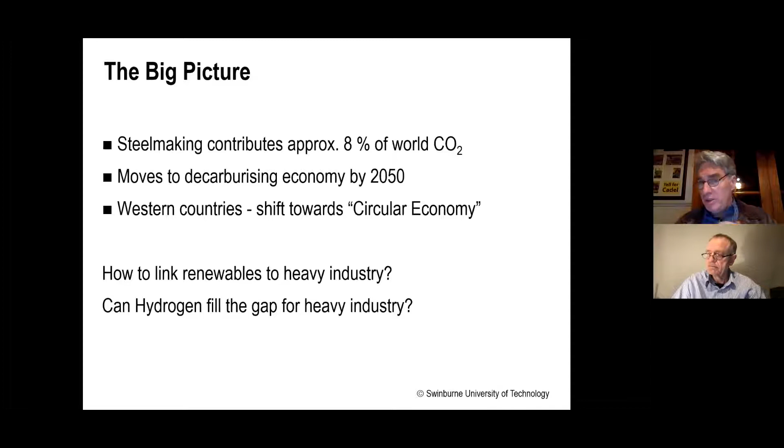That's not so clear. Recently, people have been proposing that one way we can do that is by using hydrogen. People are saying hydrogen's the answer, and it's become a bit of a hyped up idea at the moment. I think it's an exciting idea, but we need to pull it apart and have a look at how it works. By talking about the steel industry, you'll see some of the generic issues around hydrogen and what we have to think about when we say we want to move to hydrogen.

Let's get a picture of metals - a bit of metallurgy 101. One thing to realize straight away is that steel is a huge, absolutely enormous industry. What we see here are some of the principal ores in the world and roughly how many tons a year are made of these metals. You'll notice that steel is over 1,800 million tons a year - I want you to try and imagine what that means.

Aluminium is 63.7 million tons, the second metal. So steel is an enormous industry, and it's also growing - it's doubled in the last 20 years. Steel is not flattening, not on some sort of plateau. It's plateaued in a lot of Western countries, and there's good reasons why, which we'll talk about.

But on a world level, it's still continuing to grow. The only thing that's really comparable to steel that I can think of is cement, which is around double the size. When you look at some other materials you hear a lot about, like plastics and fiber composites, you realize just how enormous steel is.

To give you some sense of it, if you've ever been to Wollongong, the plant there was designed for 5 million tons a year. So basically the world is 1,800 divided by 5 Wollongongs. And I mean all of Wollongong - the harbour, the schools, the railway, all the infrastructure as well. So we're talking about some enormous industry.

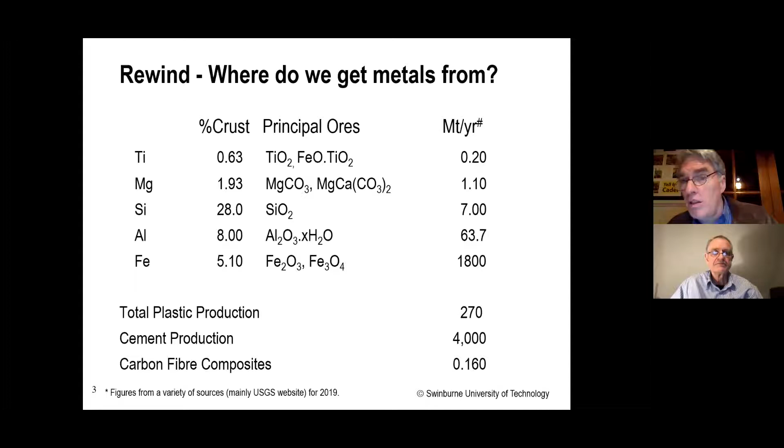That raises an interesting question, because in that list of metals I mentioned titanium, magnesium, aluminium. They're very impressive metals with very impressive properties - some of them, like titanium and aluminium, are a lot lighter than steel. So why is steel so huge? It would take a while to go through all the reasons, but one of the most important is because you need a lot less energy to make steel.

What we have here are some calculations done by my old PhD supervisor at CSIRO. He looked at Australian conditions and how much energy is required to make titanium, magnesium, aluminium, stainless steel, and steel. On one side he's got the energy, and on the other the global warming potential - how much CO2 is associated with that production. Of course you'd expect those two things to be quite related, and they are. You can see that steel is incredibly less energy intensive than titanium, magnesium, and aluminium.

This is why steel is so popular - it's got good properties, not as light as some of those metals, but excellent properties, and you don't need that much energy to make it. So steel is already a relatively high efficient industry, but of course a tiny difference in steel is a big difference in the world. That's one of the things that's motivated me to work in steel.

I haven't worked much on titanium, but I've worked a lot on aluminium and magnesium, and a bit on stainless steel. But one of the motivators of me working on steel is the pure importance of it to humanity, the pure scale of what it means to improve something in steel.

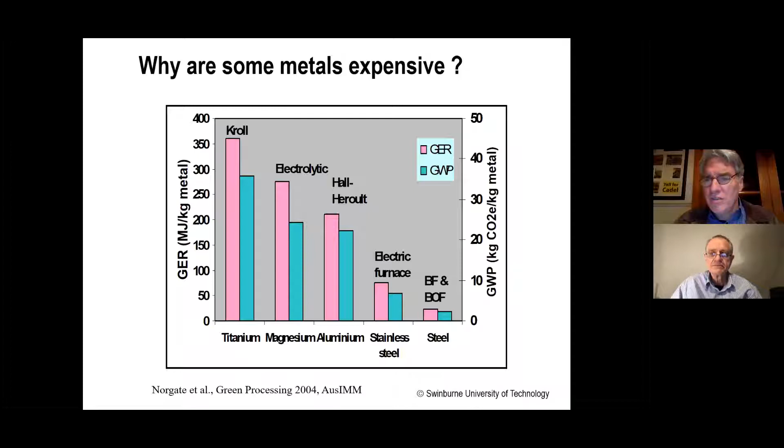So I hope that gives you some sense of the scale of what we're talking about. Australia is a major player in this game because we are a relatively minor steel producer, but we are a very large iron ore exporter. We're one of the great iron ore exporters of the world, probably the greatest. Maybe Brazil would challenge us.

When you look at iron ores, they come in basically two major sources, hematite and magnetite. And there are other ores, goethites and siderites. These ores, if they were pure, would be above 70%. But in reality, they're lower than that because of all the impurities. And the impurities are very, very important to what we're discussing tonight. As you'll see, they're not trivial issues, and they're not trivial to Australia. Basically, you'd say a high-grade ore is 65 and above, and a low-grade ore is anything below 62. It becomes a lower-grade ore.

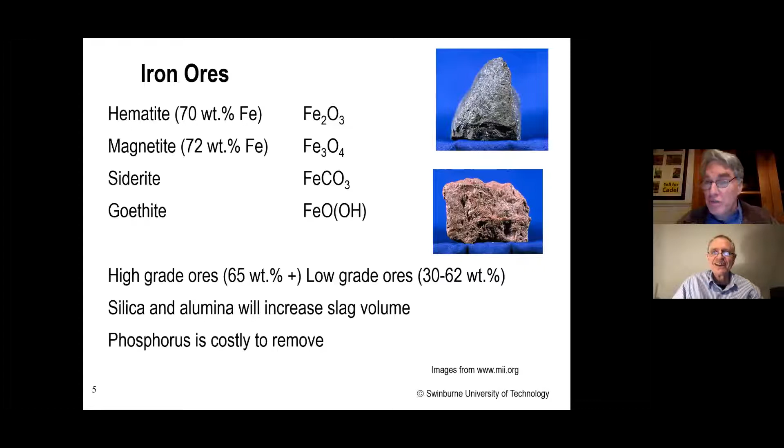The impurities, which are normally silica and alumina, add a lot of issues to the steelmaking process. The one thing that really adds a lot of problems is phosphorus. I'd have to give a very boring half-hour lecture on thermodynamics to fully explain why phosphorus is such a nuisance in steel, but the basic reason is because it behaves chemically very similar to iron. Therefore, it's extremely difficult to get out of iron, because you're trying to remove something like iron from iron. All right, so that's basically the problem. Whenever I teach the thermodynamics of it, I use football analogies about taking Collingwood supporters out of a team of Carlton players to try and explain the issues with phosphorus. But basically, they behave quite similar to each other.

As I mentioned, we have a giant iron ore industry. I think everybody in the room would be aware of that. And the industrial revolution of China, which must be the greatest industrial revolution of all time, has fueled an incredible growth in our iron ore industry. I think everybody is aware of the incredible money associated with iron ore over the last 20 years. And so this has a great deal of bearing on the wealth of Australia.

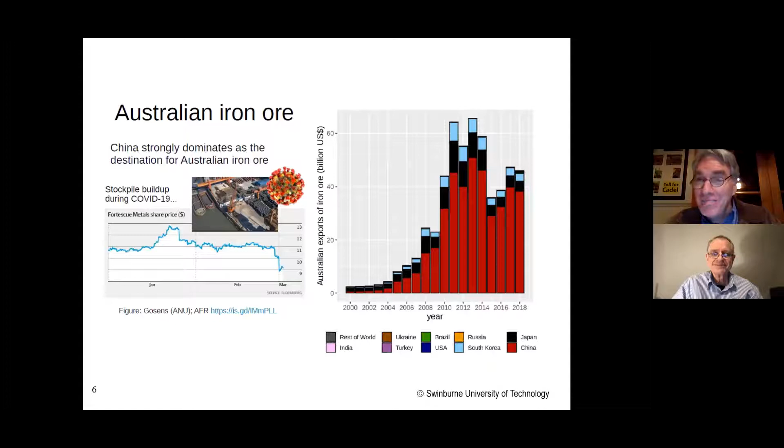A really big issue that we're going to talk about tonight is, if we move to a hydrogen economy, what does that mean to our iron ore industry? That is a very interesting question that's actually keeping a few people awake at night. So we'll talk a bit more about that.

So one of the big issues facing the Australian steel industry - sorry, the iron ore industry - is as they dig away more and more ore, they get to lower grade ores, and then we've got to find ways to try and improve the quality of the ore in a financial way that will allow us to keep selling these ores. So this great iron ore boom, we shouldn't just assume it's going to keep on going. There are major technical issues there. I've done personally a lot on trying to upgrade magnetite ores - I won't talk about that tonight, that's a whole separate topic in itself. But these are big national issues, and there's a lot of serious people working on it.

This gives you an idea of how ore grade is changing with time. We see here some historical numbers - this has been put together by my friends at Monash and RMIT, who did a nice study on this. They show the way in which ore quality is changing with time. You'll see that Brazilian and Australian ores are at the top there, around about 60, 61, 62%. And we see Chinese ores aren't very good - well, fortunately for us, because they want to buy our ores. You can see there's a general trend down, as I described. Basically what's happening is we're digging up all the good ores, and we're left with the ores that aren't as impressive.

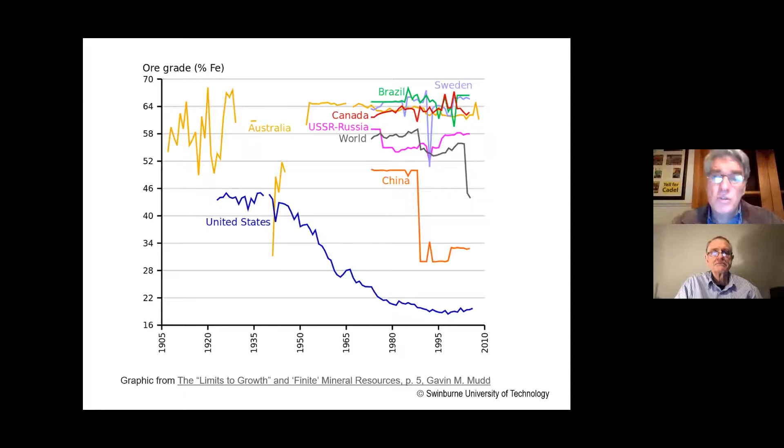So this is going to be a big challenge, not just for Australia, but for humanity, because there are all sorts of energy repercussions to the degrading of these ores. And then, of course, the products.

You'd have to be quite an ignorant person not to realize the importance of steel. Here are the major products that come from steel. Infrastructure is enormously important in the developing world, and on the right-hand side we have domestic appliances and automotive, which become more important as you become richer.

So basically, when China is progressing across that graph, 20 years ago they were all about building things, buildings and bridges and railways, etc. As they get richer, they'll become like us and start buying fancy domestic appliances and imported Swedish kitchens, pushing across that line of products.

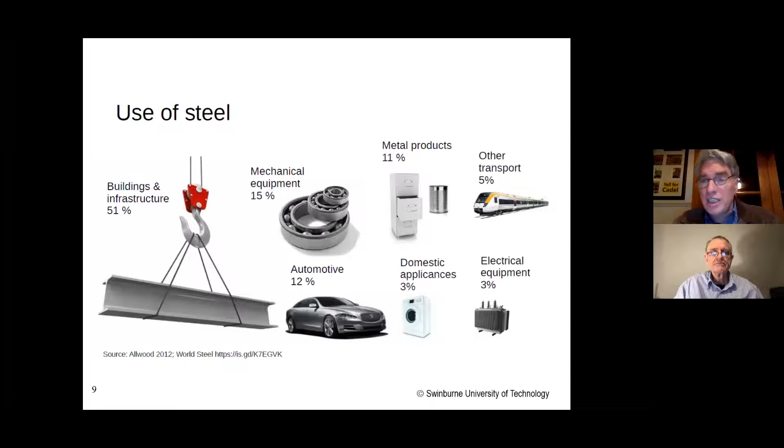Basically, it's more complicated than this because there are literally thousands of steel alloys. But as you go to the right of this diagram, it's more difficult to make, it becomes trickier to produce. So there's a lot of knowledge in being able to make all those different products from steel. That gives you a sense of the breakdown of steel, where steel is used in the world.

Now we get to the topic. This uses a lot of carbon, and indeed the world's steel industry is, as we mentioned, 8% of the world's carbon dioxide, depending who you ask. The Paris Agreement says we need to get that down to 400 to 600. That's a very large change, by 2050.

When you look at trying to work out how steel production will change over the next 35 years, it's almost certainly going to grow, and it may even grow more than what they're predicting in this particular diagram, but they're having an educated guess.

That means we've got to find ways not only to get rid of the carbon from the existing process, but also from future steel production. You can see on the right-hand diagram just what an incredibly large change we need to make to the intensity, how much carbon dioxide we produce per ton. We're talking about 90%. We're not talking about an incremental improvement here, we're talking about a revolution.

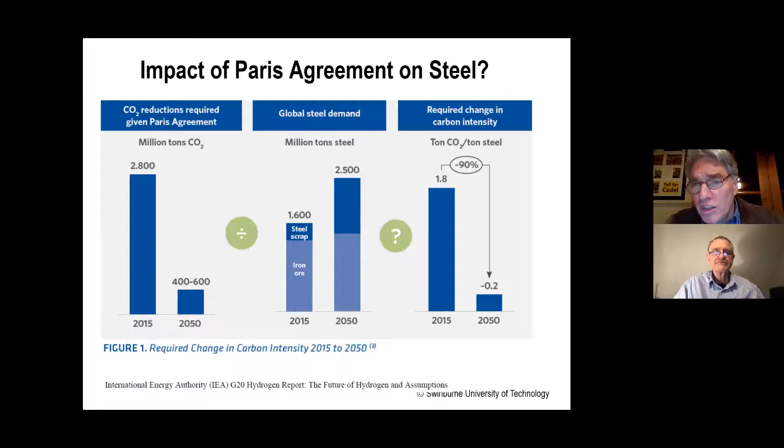So this is not a mild change, and this is what's keeping steel executives, iron ore executives, and professors who work in this area awake at night. How are we going to do that? How are we going to make that happen? So that's an exciting but also interesting challenge.

Now, I have an unfortunately busy but important diagram, so I'm probably going to spend the most time on this slide because it's important to understand. Basically, there are essentially three major ways of making steel in the world.

The biggest way is we start off with ore, and we get coal and turn it into coke, and take it to a blast furnace, the one at the bottom there. We put it through a blast furnace and make iron. That iron then goes off to a steelmaking process, the basic oxygen steelmaking process, where you make steel. Then the steel is refined, and then it's cast.

It's generally cast into what they call flat products or long products. Flat products end up in your refrigerator doors and your cars, and long products are reinforcing bar and beams and such things.

The other major way we make steel, the second major way, is we get scrap steel. This is what they do in Sydney and Melbourne at the Sydney Steel Mill and the Laverton Mill, where my friends work. We get the scrap steel, put it in an electric arc furnace, melt it, refine it through a ladle, and then cast it into different shapes. That's the second major way, running in the middle there.

How much energy is needed for recycling versus new steel? About half, roughly speaking, but hang on, I'm going to go into that in quite some detail.

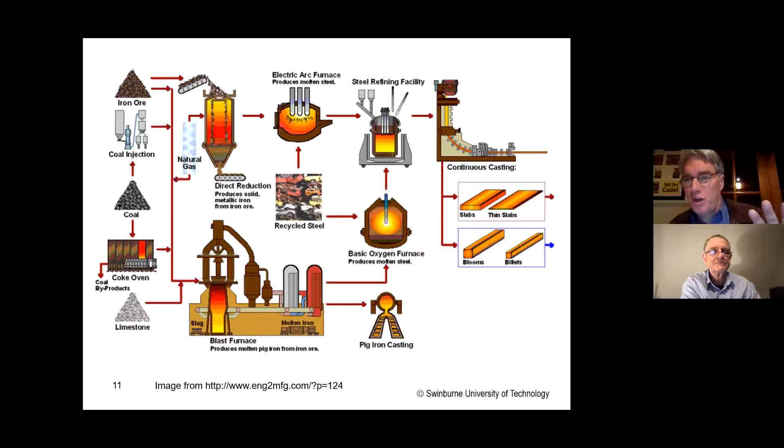I can imagine that's a little bit confusing, I think it'll become clearer, so we might go back to this diagram, but just to get the general gist of it: the blast furnace is the dominant way of making iron, and it's been around for hundreds of years. We've put tremendous development into it, and it's essentially a solid gas reactor. You've got gas blasting through these tuyeres, going up through the middle of the furnace, and it reacts with the iron oxide.

It's burning, basically converting carbon into carbon monoxide down the bottom here, and it goes up through this shaft, and you go through this sequence of reactions. The solids fall down, and as the solid falls down, it goes from hematite to magnetite to FeO, the FeO being reduced to iron. Then molten iron forms at the bottom. So solids this way, hot gases going that way - it's a solid gas reactor.

And it's very old, but it's also very impressive. It has very high energy efficiency, like 85%. For example, power stations are typically 35 to 40%. So it's a very efficient reactor, and there's been a lot of investment.

I'm happy to report that Australia's been very clever in blast furnace technology. Professor Aibing Yu at Monash and Paul Zulli at University of Wollongong have done a lot of work in this area to improve the blast furnace, working with companies.

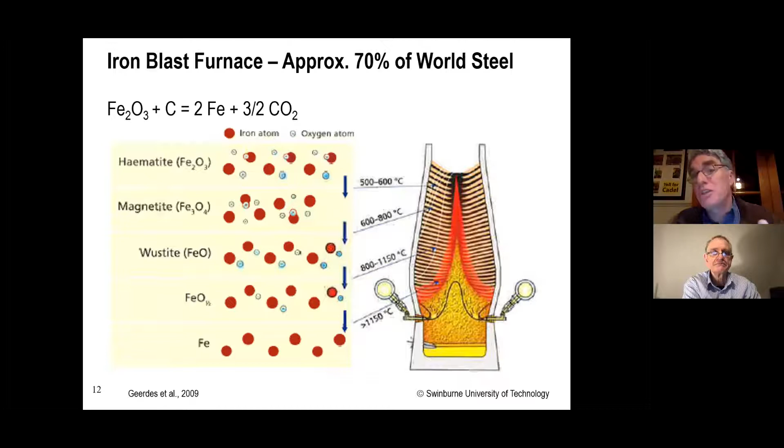This process relies on coal and coke, and the coal is turned into coke because these are very tall vessels, and the coke provides the physical strength and structure to hold all this ore up. So you can't just put any kind of coal in there - you've got to put a certain sort of coal that can be converted into coke. That's very important to Australia as well, because we're one of the world's great coking coal producers. So about 70% of the world's steel is made via this process, and there are a lot of details, but that's the broad picture.

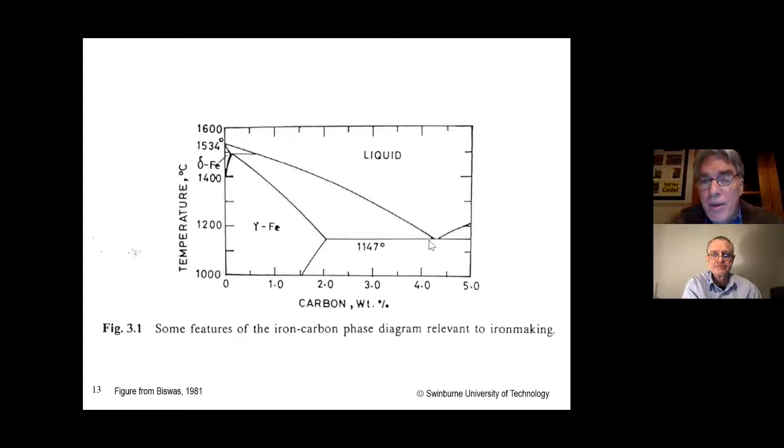One thing that's important to appreciate, because it'll become important when we talk about these new processes, is that as you add carbon to iron, the melting temperature decreases. You'll see here that pure iron is about 1534 degrees Celsius, and as you add carbon down this line, its melting point lowers to about 1150, or 1147, as written on the diagram. That's very important, because it means the blast furnace can melt this material fairly easily at the bottom of the furnace and produce the iron product that we tap out. Just a little important fact to appreciate.

Now, when you look at this process, the blast furnace and the oxygen steelmaking process is the big one in the world that makes most of the world's steel, and the blast furnace dominates the CO2. When you look at the total CO2 coming from the process, it's the blast furnace that is making most of it. There are other sources associated with other parts of the process, like coking and sintering, but it's the blast furnace that dominates. So this is where all the attention is at.

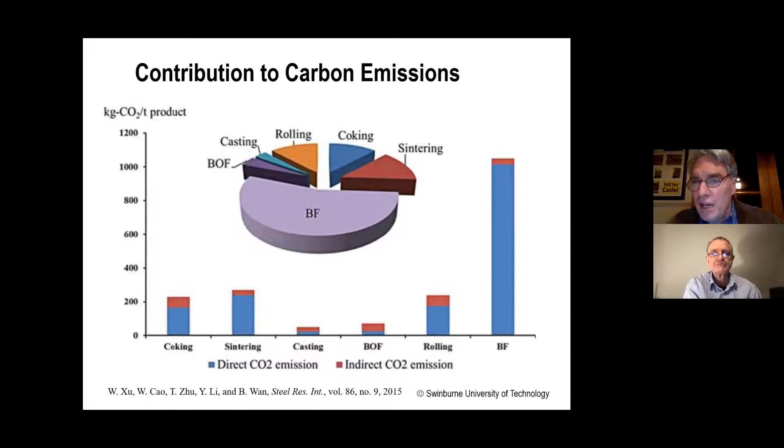If we want to decarbonize the steel industry, the first step is to do something about the blast furnace - stop putting so much coal into it. How could we do that? This diagram shows that quite clearly. Now, I've just been talking about the blast furnace, and because that previous diagram is very busy, I think I'll just break it down into a smaller step so everybody gets what's going on.

In the blast furnace, we get ore and turn it into sinter or pellets, and put it into a blast furnace. We then get coal and turn it into coke, put it into the furnace, and out the bottom comes a liquid product called pig iron, which has about 4% carbon. On the other side, the other way of making iron is DRI: they get iron ore, put it into a pellet, pelletize it somehow, and then react it with natural gas, forming a solid product - it's not liquid, it's solid.

You can transport it, you can ship it, you can put it on a ship. But because it's never been liquid, all the gangue materials are still in it - all those silicas and aluminas we talked about before. It's a solid product. So DRI is essentially a solid product with lots of gangue, and pig iron is a liquid product with no gangue. That's something to appreciate about the different forms of iron we're going to talk about now.

So gangue, what does that stand for? Is that an acronym? It means the materials that you don't want - silica, alumina, like slag, only before it becomes liquid. Yeah, so it's a slag. It's a residue you don't want.

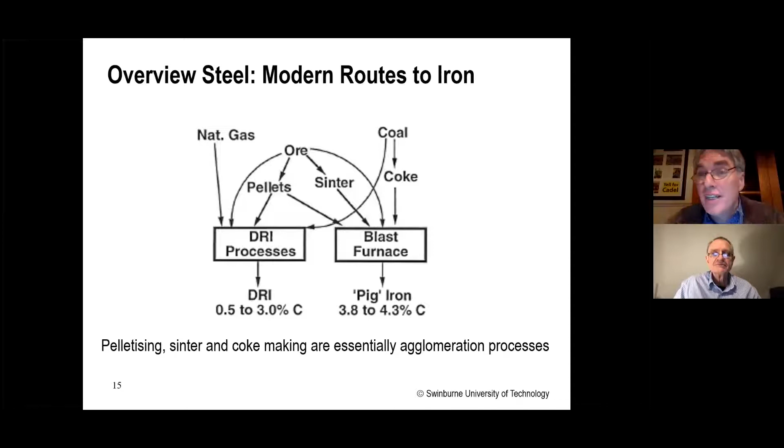There are quite a few DRI processes being developed around the world, but the biggest ones are Midrex and HYL. Since 1990 to just a couple of years ago, that's gone up to 80 million tons. Once upon a time DRI was a very minor way of making iron; now it's quite significant and well established. Some people are saying that graph needs to go up really steep, and we need to start using hydrogen in that process - that's essentially what people are putting forward.

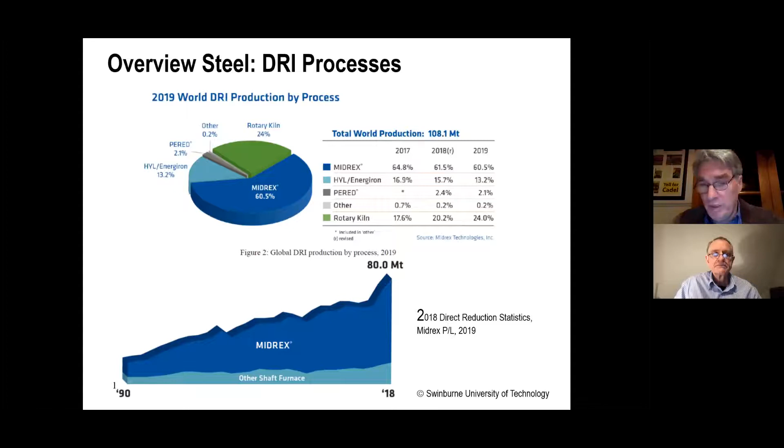The DRI process - I won't go into the details - but something very important to know is that it currently operates sometimes up to 90% hydrogen. I wish to repeat that: currently, using natural gas, they use up to 90% hydrogen. In other words, we already make a significant proportion of iron using a very high level of hydrogen without generating CO2 via this process. So you can imagine why people are excited this could be the answer to decarbonising the steel industry, because we already get pretty close to that.

This process is very well established, with plants producing up to 2.5 million tonnes a year. If you believe what people are saying at the moment, when you drive through Wollongong or Whyalla in a few years from now, you won't see a blast furnace - you'll see one of these, or something like this. That's the kind of argument we're hearing at the moment.

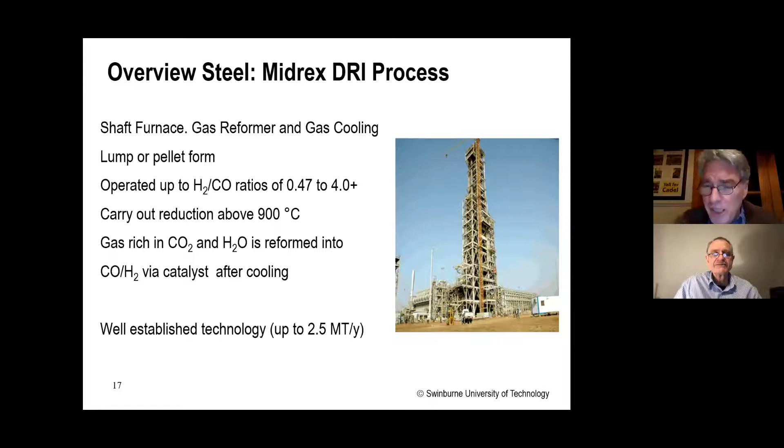Now here's the graph David was asking about - this is an important one. What we have is kilograms of CO2 per steel, for the standard route - blast furnace and BOF. I won't go through all the other ones, but here's an important one you asked about: scrap in an EAF. You can see that scrap in EAF is a lot lower number.

Notice if you go down to scrap with a renewable energy source for the EAF, it goes down to a very small number. And this one, basically a hydrogen DRI process they're making in Sweden, is a tiny number. So, in a complicated way, these two are the answer on the right-hand side - two things we could do that would dramatically lower the carbon footprint of steel, and we know how to do them, which is a little bit exciting. So the answer, or rather the answers, are there. But as you'll see, there are a few complications that are very important to understand.

So why don't we just stop digging up iron ore? Why don't we just use scrap, and go fully circular? That's a question I'm sure some of you are asking. Well, when you look at the supply of scrap in the world, it's not as large as the steel produced - but it's a good proportion of it. So there are arguments that we need to be smarter with the way we make products, and start thinking about using less steel and living on scrap.

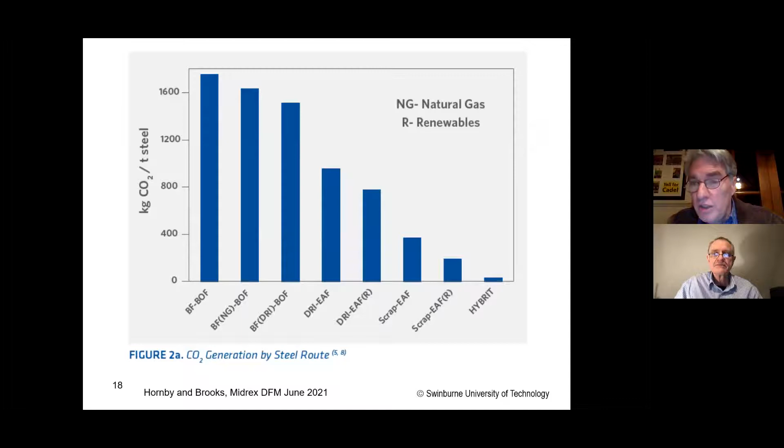Actually, one country getting relatively close to that is the USA. Even though we sometimes say the USA is not very environmentally sensitive, particularly one side of politics there, they actually have a very, very large level of recycling going on. And as you can see from the previous diagram, that already substantially lowers your carbon footprint. So the Americans are a fair way down that path. But if you go to China, they don't make much.

Sorry, what's obsolete scrap?

Things that obsolete equipment, it can still be used and put into the process. It's not obsolete for recycling, it's obsolete for use.

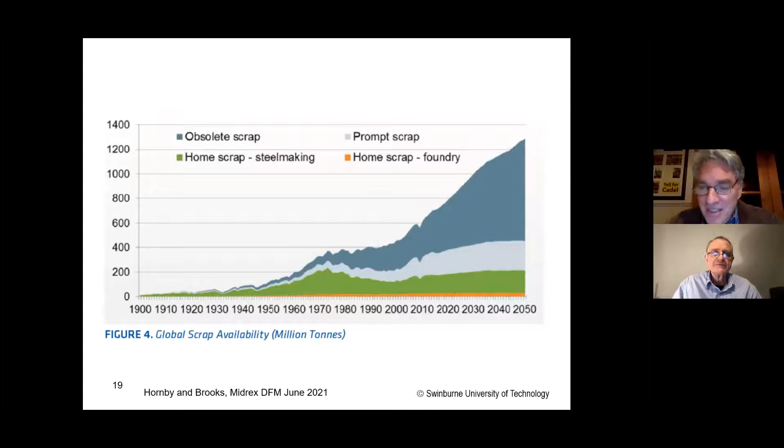So here's my decarbonization strategy number one. I'm going to present two major strategies. First strategy: let's move to scrap-fed EAFs, and let's actually use renewable energy. Let's connect the renewable energy to the EAFs, and that would straight away dramatically lower the carbon footprint of steel production. That sounds easy, doesn't it? Well, it's not easy because there's some complicated metallurgical issues.

The first complicated metallurgical issue is that there are a lot of residual elements, contaminants in scrap. And when you're trying to make high quality steel, it's actually non-trivial to get rid of those residuals, very non-trivial, in fact sometimes impossible, I'd say. One of the worst ones is copper and tin. So if any of you ever throw some copper or tin into a pile of steel scrap, you are a great enemy to steelmakers. They would probably want to know your address and come send a nasty message to you. It's almost impossible to get those elements out of steel.

So there are metallurgical issues. There are also social political issues. We are going through enormous pain about the future of Whyalla. Can you imagine if we said, let's close all the blast furnaces in China and Europe and Japan? We're talking about disrupting hundreds of cities, an enormous amount of capital and human investment. So the social and political repercussions of such a move would be extraordinary. But in principle, this is the simplest way to dramatically lower the carbon footprint of steel: moving to scrap with renewable energy supplying the electricity.

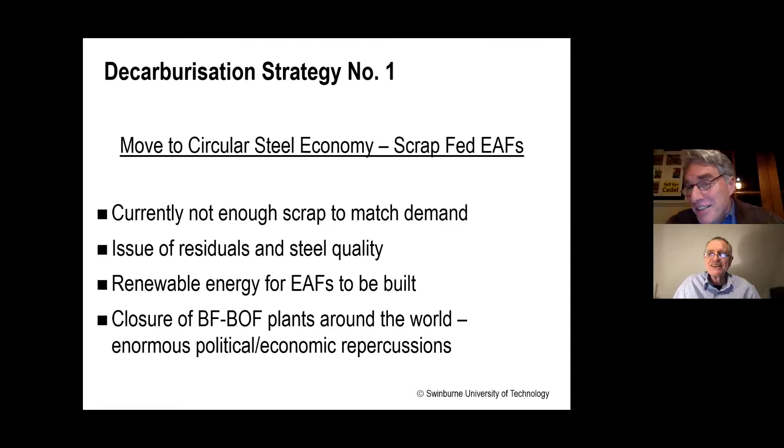Do they still use tin in tin cans, tin coating of steel? Yes. And is that a problem? Yes. Are there good alternatives? I guess if there were, they would use them. Yeah, but they try to avoid that being put into the process. And if you can't recycle tin cans, then it makes it... not very readily. Actually, a good question. Off the top of my head, I don't know what they do with tin cans. It's a very good question. I have to think about it, Doug.

So what's this mean for Australia? Because I said that's what it means for the world. What does it mean for Australia? Well, for Australia, we have two large scrap melting shops, one in Sydney, one in Melbourne, and they are running off electricity from coal-powered stations, and they also use quite a bit of natural gas to help put energy into the system.

We also export scrap to Asia, quite a lot of scrap. And one of the reasons why we export scrap is because we haven't built enough EAFs. We really should have an EAF in Brisbane, in my opinion, because that is a large population base. Basically, an electric arc furnace fed on scrap bases itself on the population around it. So if you've got enough people buying fridges and cars and all the rest of it, then you can justify having an electric arc furnace and make a good business from it.

So I think the future challenge for Australia's first decarbonization strategy, the easiest one, is to bring renewable energy to our electric arc furnaces. We're going to come up with a plan to bring renewable energy to our large electric furnaces. That is a quite doable thing. We have the technology, and I think we have the know-how. So that's a simple strategy: build more EAFs so that we don't have to export our scrap, which is, I think, sort of a mind-bogglingly unintelligent thing to do from a national perspective.

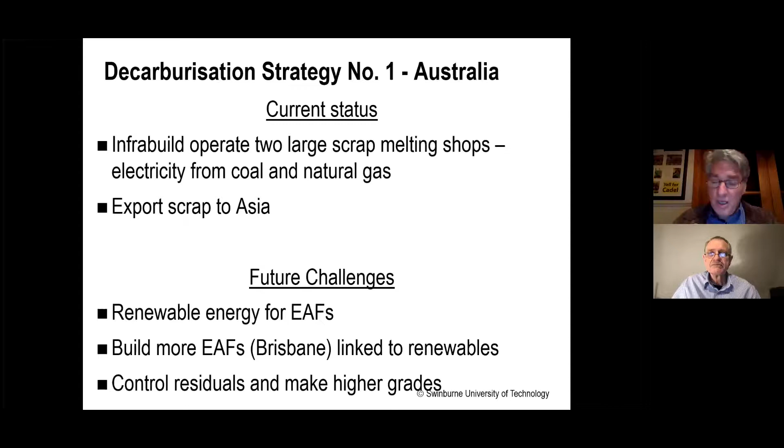And then the bigger challenge: if we do that and start trying to live off our own scrap, then we have to start making higher grades of steel. Because at the moment, we're making the relatively simple grades with our recycled steel. But if we want to start being a circular economy, we're going to have to start making all the grades of steel. So we're going to have to get clever, and quite smart at sorting our scrap. Now, I can report some nice news about that.

I get supported by all the steel companies, of course. I work a lot in steel. And I did a very nice project with InfraBuild, where we tried to assess the feasibility of monitoring the elements coming into the scrap and then using that to improve the process.

They gave us a lot of data, and we also did a lot of interesting work with a Brazilian university, and we wrote the paper. When you write most papers in this area, you don't always get much reaction, but I published it and got so many queries from around the world. Then last year, the Institute of Materials, Minerals and Mining, a London-based organisation, awarded this the best paper in steelmaking in the world. So it's a nice story.

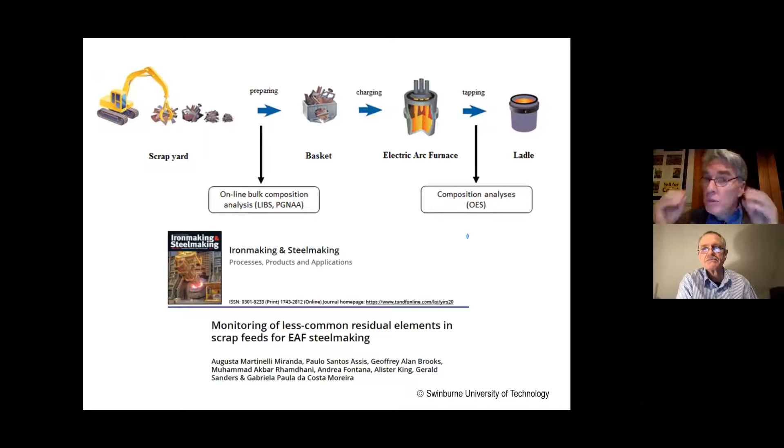But we're going to have to do a lot more of this, right? If we're going to move towards a circular economy, we're going to have to get cleverer and cleverer at how we sort our steel, how we characterize our scrap, and how we control the process. We're going to have to implement some technologies. I believe it's doable, and I think we can do it. The next strategy, I'm now getting to the next big strategy.

As I've been implying, move to hydrogen-based iron making. That's the next strategy. Let's decarburize by using hydrogen. We know that hydrogen can work. So the questions that come from that: is it affordable? Can we make enough hydrogen to do this? Is that possible? That's a big question.

Second question: do we use green or blue hydrogen, which I will explain in a minute? And can we adapt the existing technologies, or do we have to build something different? That's another big question. Remember, the world steel industry, particularly China, has invested literally billions and billions of dollars into their furnaces, so you don't casually just bulldoze them down, do you? Can we adapt the technology to this hydrogen fuel? That's the big question. And what will be the impact on steelmaking?

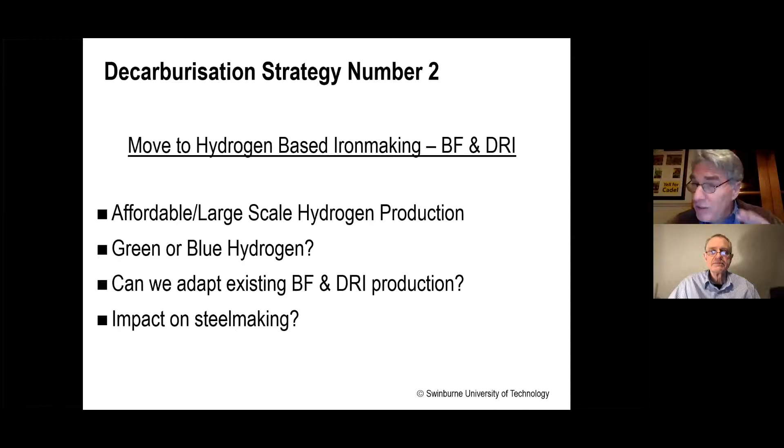This last point is not thought about very much in the popular press. When you read people talking about this, there are serious impacts, which I'm going to explain to you.

So what would a hydrogen economy look like? Well, we would have renewable energy, electricity, wind power, solar, pumped hydro, etc. And we would use electrolysis, a known technology, to make hydrogen. That hydrogen would be stored, and then used in transport, or used for electricity generation, or used directly in our process. And we'd use fuel cell technology to fuel transport, et cetera.

It all sounds wonderful. If you look into the details - and I'm not an expert in hydrogen storage and such things, but I know a bit about it - it's quite a complicated thing. There's a lot of issues about materials, about safety, and just about utilization of the hydrogen. They're not trivial - doesn't mean they're not solvable, but they're non-trivial. There are certainly significant issues, and there are very significant social issues too. If you say, I want to go and build a hydrogen storage facility next to your house, one can imagine this is not a simple thing. There are many issues there.

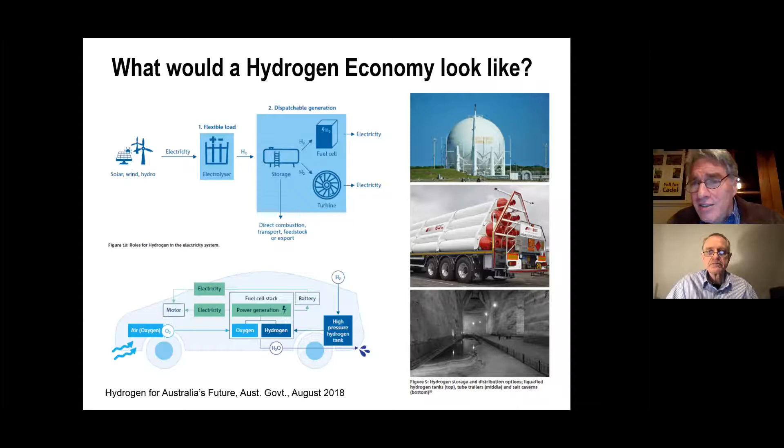Now we get to this business about blue or green hydrogen. The classification people use, so we don't have to keep explaining it: blue hydrogen uses existing, well-established technology - either steam methane reforming or gas or coal gasification - to make the hydrogen. Then the CO2 generated from that process goes through carbon capture technology. They call that blue hydrogen. Each one of those steps is relatively well known, in other words, we know how to do it. There is controversy about the carbon capture part, so there is some political and economic issues around that, but we know how to do it. There are ways of doing it.

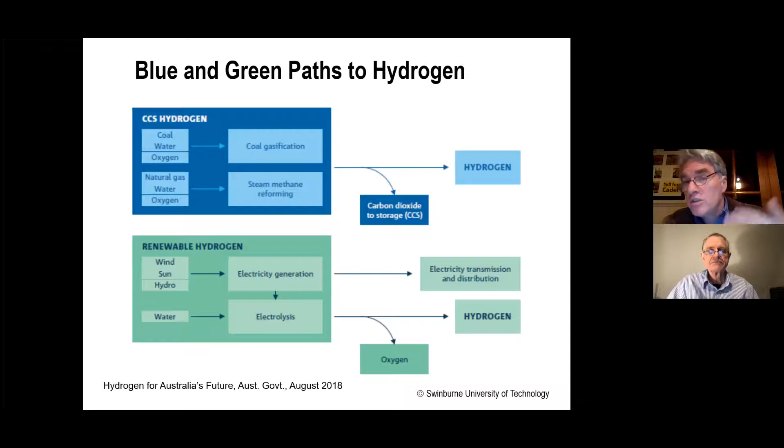In the case of green hydrogen, we also know all the steps as well, but at a lower scale. With green hydrogen, you use electrolysis of water fueled by renewables to make oxygen and hydrogen, and you feed the hydrogen to the system. We call that green hydrogen, just to explain the lingo, the language. As I mentioned, water electrolysis is relatively well established, but not at large scale. There are two major technologies: one is an alkaline system that has a membrane to separate the two sides of the electrolysis reaction, and another called the proton exchange membrane, which has a solid barrier between the cathode and anode.

It was developed in reaction to some of the perceived weaknesses of the alkaline technology, in particular current density. Any of you who've studied Faraday's laws will know that current density is very important in the economics of electrolysis. If you can make a lot of hydrogen for your square meters, essentially.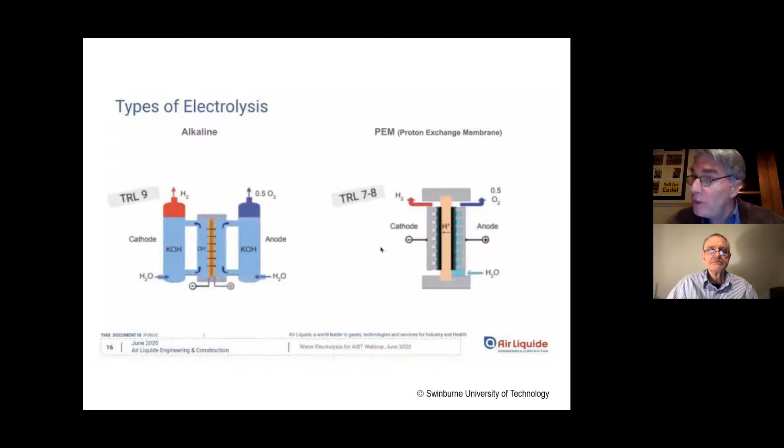So these technologies are quite well established and well known, but they're not at large scale, all right? They're relatively small scale. To give you some sense of it, Air Liquide is one of the major companies of the world that is actually working with the steel industry. They're a big gas company, but they work very closely with the steel industry, and they are heavily involved investing in hydrogen technology.

This is from a presentation from last year. Their biggest plant using green hydrogen is 20 megawatts. Well, that's an awful lot of power to you and me, but it's not an awful lot of power compared to a steel plant, all right?

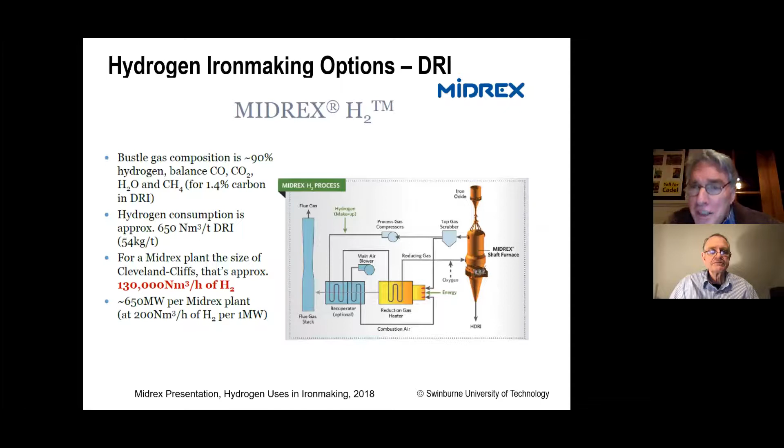So to give you some idea, here is a Midrex system, which they're putting forward to produce using hydrogen. They did some calculations on a 2 million ton plant, and they came up with a 650 megawatt hydrogen plant is required for this plant. I'll just repeat what I said: this commercial plant is 20 megawatts, right? So we're talking about some very, very serious engineering issues.

At the moment, there are plans all around the world, particularly in Europe, to build very large green hydrogen plants. Everybody in the steel industry is watching with great interest about how that will work, because there are issues about stable operation, issues about safety, and capital cost issues. But optimistic people think they can scale up and improve the economics, and other people say, well, I'm not sure about that. So this is a very big question at the moment, and the world is watching.

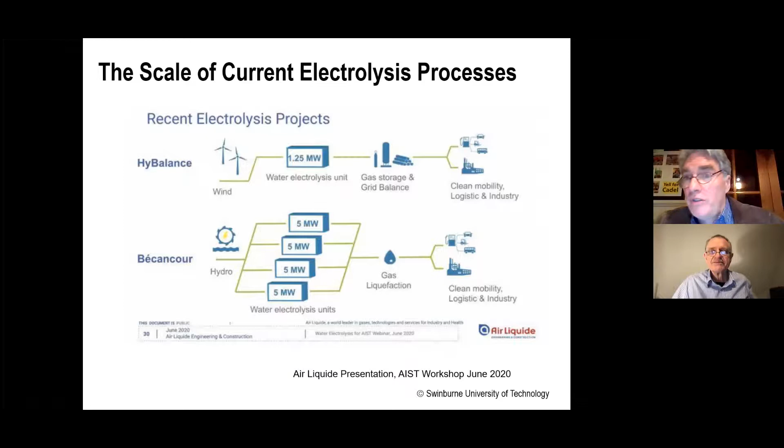Just to give you some sense, state of the art is 20 megawatts. What's required? Over 600, all right? So that's a big jump.

Now, there's been a lot of people doing calculations about how much this green hydrogen route to steel will cost. I'm not going to get into the details of it. I do know some of the details, but it's a very unfortunate debate because it tends to be very specific to the location, the particular technology, and the details of what you're discussing.

I just attended a conference, virtually, in America where lots of people were talking about it. To give you some sense, a highly respected expert, Sarah Hornby, a big electric furnace expert in North America, was estimating that hydrogen will add 55% to the cost of steel in America. Another speaker was looking at calculations from the Institute of Energy, and he came up with a 43% increase value. I've seen other papers that say more like 20%.

But even at 1, we're adding 20% to the cost of the steel. That is not a trivial issue, because whoever does that has to compete in the world. You'll notice that the European Union last week said, if you start selling your steel using carbon into our market, when we decarbonize, we're going to tariff you. I think they said 2036. And that's the reason why. Even the most optimistic person in this area doesn't think that $1 is a quite optimistic number, all right?

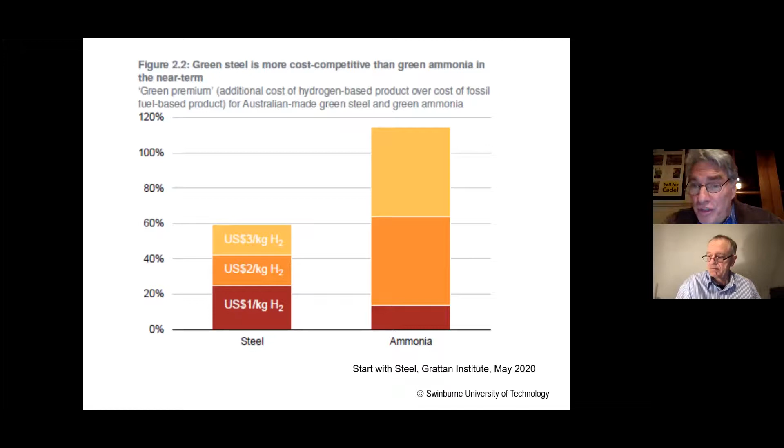So there's a lot of debate about whether we can take it from 3 to 2 in terms of cost. As I said, it depends a lot on location and the details. But taking it below 1 would be a major challenge, all right? And this graph is also showing that steel is a very good candidate, because when you compare it to ammonia production, steel looks rather good. So steel is seen as a very good candidate for this decarbonization.

So is hydrogen the answer for steel? Well, there are issues around handling and safety.

This whole issue about carbon capture, that's a very controversial technology, because it often involves pumping carbon dioxide down into large underground storage places, like old oil fields and such things. How acceptable is that politically and socially, I think is not trivial. There are also debates about the cost.

But what must be said is that there's quite a large body of knowledge about carbon capture technology, so we shouldn't sneeze at it. Maybe it's part of the answer. Some people say, for example, our current federal government does believe that some sort of carbon capture combined with a move towards renewables is what we need to do. I can see the arguments both ways if I try and put the politics aside.

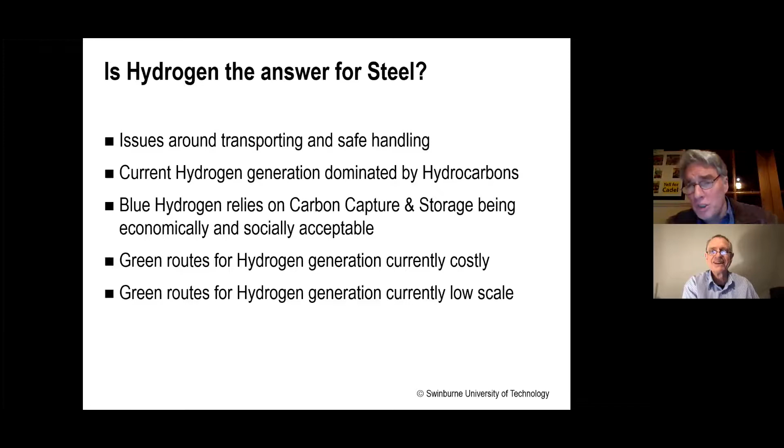At the moment, we can say with some accuracy, the green routes for making hydrogen are at quite low scale compared to what is required for the steel industry, and current green hydrogen is relatively expensive. So there's a lot of room for innovation in this space, and I know there's good people in Australia working on that. If I've insulted anybody in the room who's working on it, I'm sorry, please correct me. If you think it can go below $1, for example, I'd be quite interested to hear about it.

So what are the major options? Well, we can stick it into the blast furnace, as we said. You can put it into a DRI process, which has already been largely shown to be correct. And you could also put it into a fluidized bed, and this has actually been done at commercial scale. We've already done it, it's already a done deal, we've already actually demonstrated this.

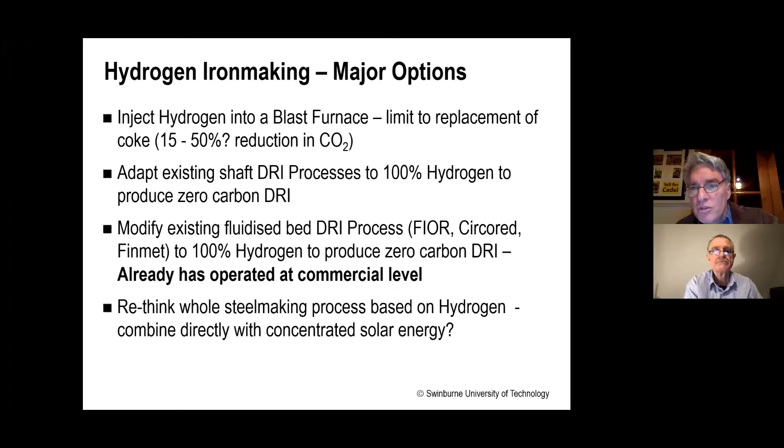And another thing, the fourth one, is perhaps we really need to rethink the whole steel process in light of this hydrogen. Maybe that flow sheet I showed you, about what we've developed over hundreds of years, needs to be rethought if we go down this hydrogen route. So I'll talk to those first three options, and I'll try not to take too much time because I'm already stretching my luck.

So I'll keep going. This is the one that's been commercialized. This was actually done in the West Indies in 2005, 2006, 2007, and they made hundreds of thousands of tons of iron using hydrogen, 100% hydrogen. They then got that iron and sold it to steel mills and made steel. So it's already been done, it's already been shown that it could be done.

This is a fluidized bed process, a two-stage process, quite complicated. I don't know whether it's the answer to the world, but it did work and it did make commercial success, and they made money from it. Now, it is telling to say it's no longer in business, so that's probably an important thing to point out, but they did do it commercially for a number of years.

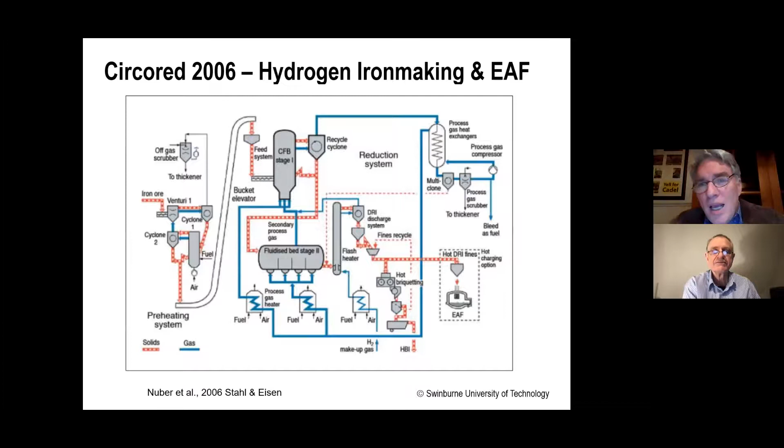One thing to appreciate is that this iron made from this has almost no carbon in it. So it's basically carbonless - an iron, not a steel, a kind of iron with no carbon. And when you have iron of low carbon, and you put it into the next process, what tends to happen is you make a lot of FeO. This is to do with the chemistry of the system - you make a lot of FeO in the slag, and that's exactly what happened when they put it into the furnaces.

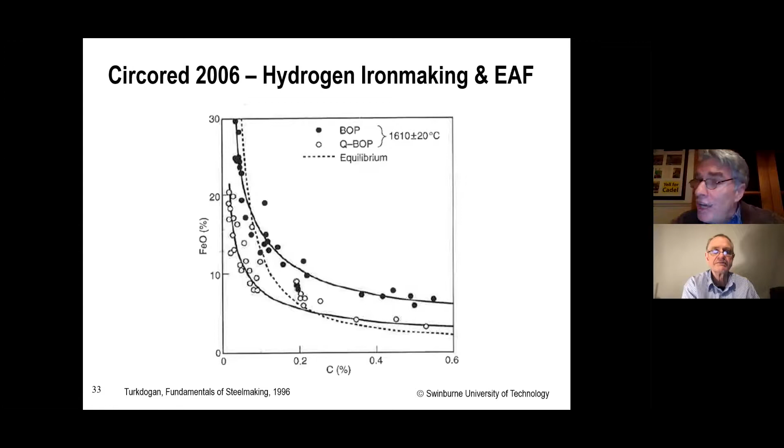And these people, to get over that problem in the electric furnace, had to inject carbon to reduce the FeO. They also had to put carbon in to make sure they got good stirring in the bath, because carbon does more than just take away the oxygen - carbon is used all through the steelmaking process. So they had to adapt the electric arc furnace steelmaking process for this kind of iron, and it was not untrivial, it was actually fairly challenging.

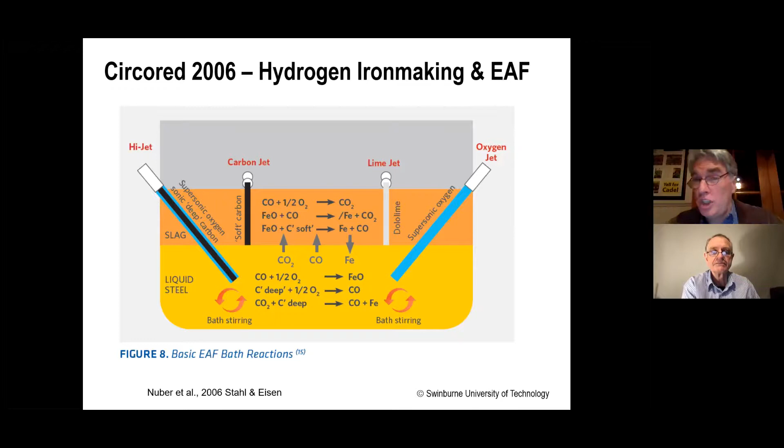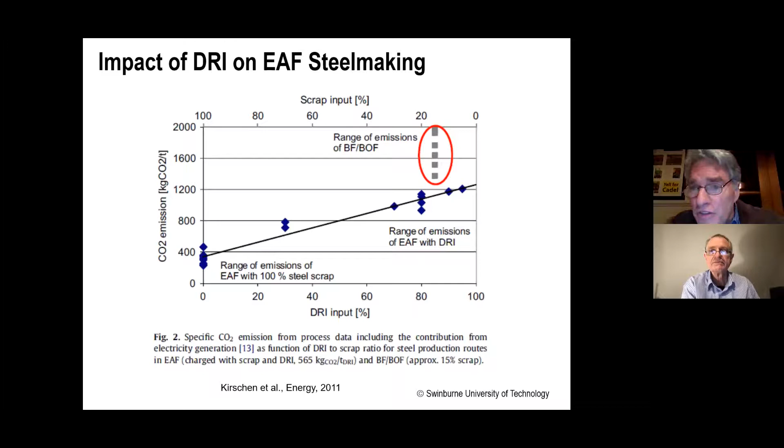Otherwise, we've got nowhere. So this graph is very interesting, and the slope will change as ores degrade. That's something a lot of people don't realize. People who know a lot about steelmaking realize it, and it's a non-trivial problem likely to keep us occupied.

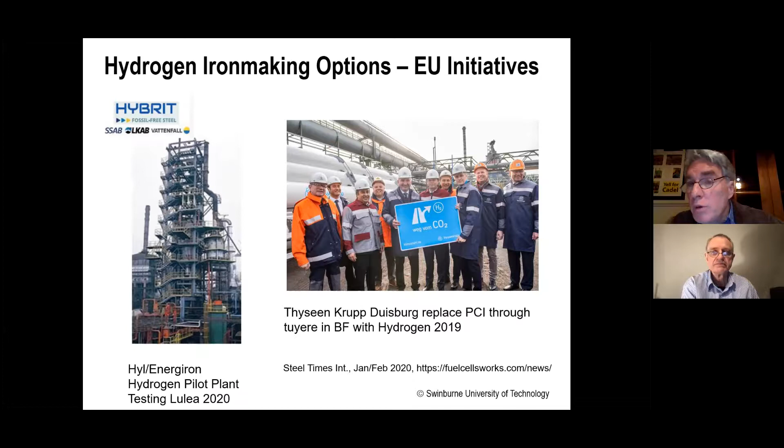Now, in Europe, they're pursuing these hydrogen options with great glee and great investment, driven by a strong political agenda towards decarbonising their economy. Two of the most prominent ones are the plant in Luleå called Hybrit, based on the HYL technology, and in Germany, at Thyssenkrupp, where they're replacing carbon with hydrogen in the blast furnace. Let's talk a bit about that, because I've got some hot news.

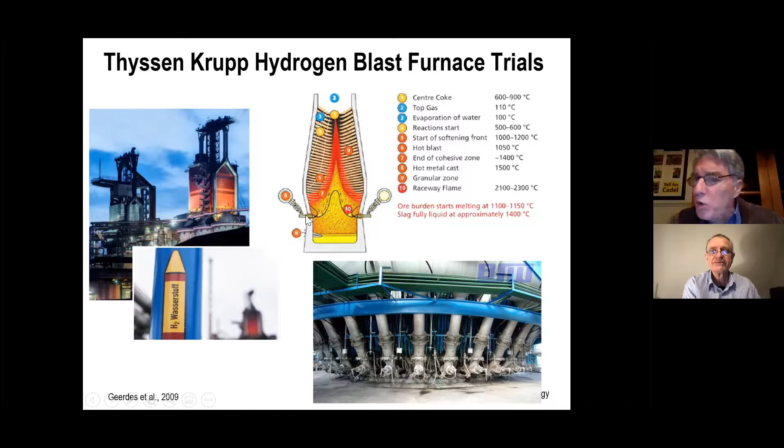So the blast furnace has all these tuyeres where you inject your gases, and this is where they're injecting the hydrogen. What they're finding is that as you inject the hydrogen, you create energy balance problems, because the reactions between hydrogen and iron oxide are endothermic compared to exothermic with carbon - reminding you of high school chemistry. Endothermic means sucking in the heat, exothermic means pushing out the heat. So these endothermic reactions cause all sorts of issues down in this area, what they call the raceway in blast furnace parlance.

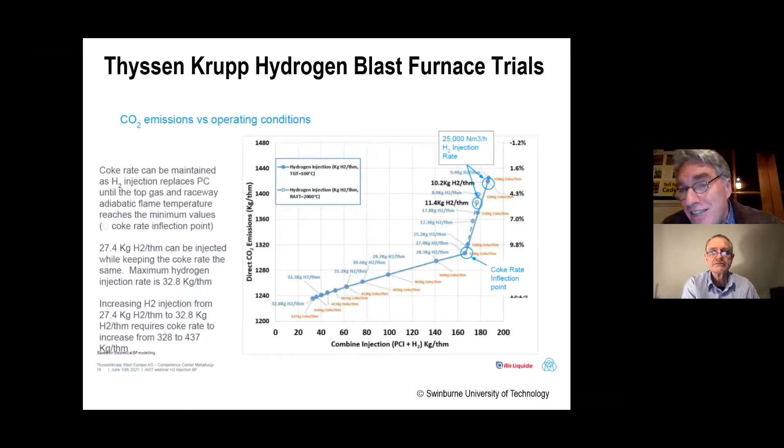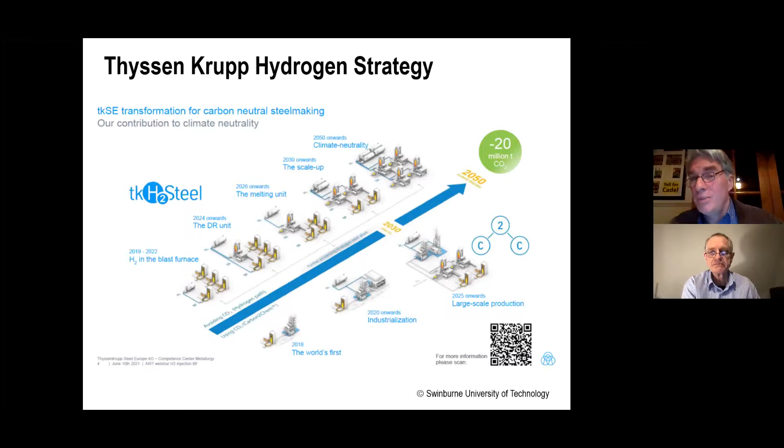So it doesn't look like the blast furnace is such a great candidate unless there is some innovation. In fact, the official strategy of Thyssen, just released recently, is actually to only put hydrogen in the blast furnace as an intermediate measure. After that, what they want to do is put more and more DRI plants in - that's their strategy. So it's only a small intermediate. It doesn't look like the blast furnace is the answer, simply put - it's too complicated to bring the hydrogen in there.

So in ArcelorMittal in Hamburg, they're going the other way. They're going for a Midrex plant, putting 100% hydrogen at demonstration level, using grey hydrogen directly from natural gas. So what they're obviously doing is trying to see whether they can make it work, and hoping that somebody else innovates with hydrogen production to make it cheaper. That's basically what I think their strategy is.

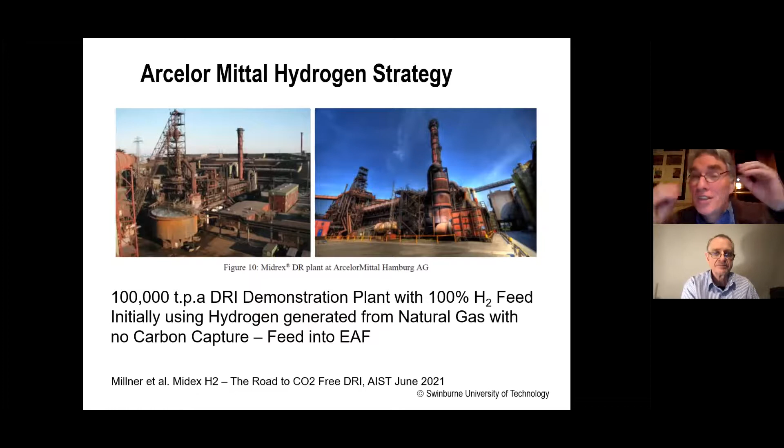All right, what does this mean to Australia? Wow, it has big repercussions to Australia. How will our ores behave? What would this mean to our iron ore industry? In fact, a CRC was just successful, which I'm part of.

Gus Nathan, I think, is at this talk, is heading it up. He convinced the federal government to put $40 million into investigating how to lower the greenhouse gases of heavy industry. One of the big questions in that CRC, which involves a lot of iron ore companies, is how will our iron ores perform in a hydrogen-based iron making process? What will that do to our iron ores? How attractive will they be? What will we need to do to succeed in that market?

As I've already mentioned, the gangue content in our iron ores will be very important to this DRI EAF route. So what can we do? Can we get the gangue out? Can we get those silica and aluminas out? I have good friends at CSIRO - they might be listening - Keith Vining. That's what keeps him up at night, trying to work out how we can get these gangue materials out of the iron ore. And can Australia play a leading role in this?

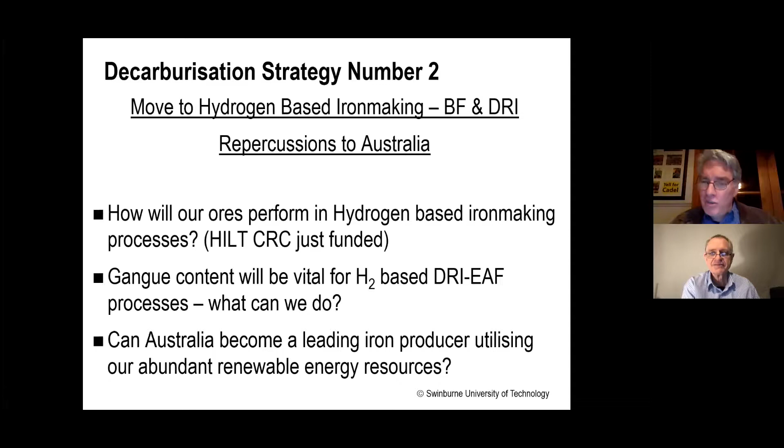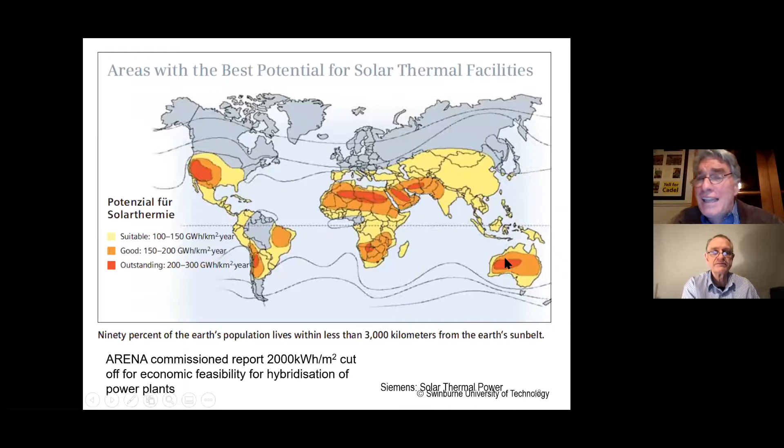Do we have to just sell the iron ore? But can we do something more? I want to bring to your attention that Australia has phenomenal resources of solar energy. I think you all know that. And our resources are exactly where our iron ore is. What a wonderful thing, right?

People like me and John Pye at ANU and some other idealistic professors say, why don't we just directly use the sun to make concentrated solar energy to process iron ores and make iron? It would take a long time to describe this all, but I've done quite a lot of research understanding not just the science of this, but the techno-economics of using concentrated solar energy to directly make iron.

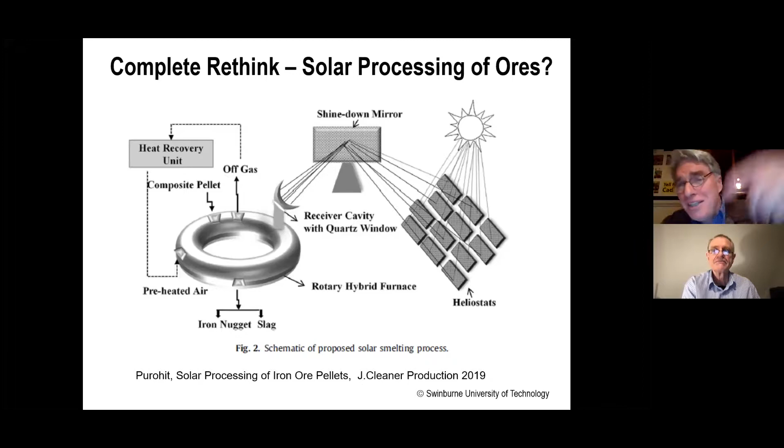When you think about it, it cuts out the middleman. It cuts out making the hydrogen - we can try to use the sun's energy directly. When we're doing these experiments at Swinburne, we use a solar simulator - essentially 7 cinema lamps shining on one spot. You don't stand there when it's on, I can assure you, that's a very hot place. And there's a DRI that we've made in that furnace using that kind of approach.

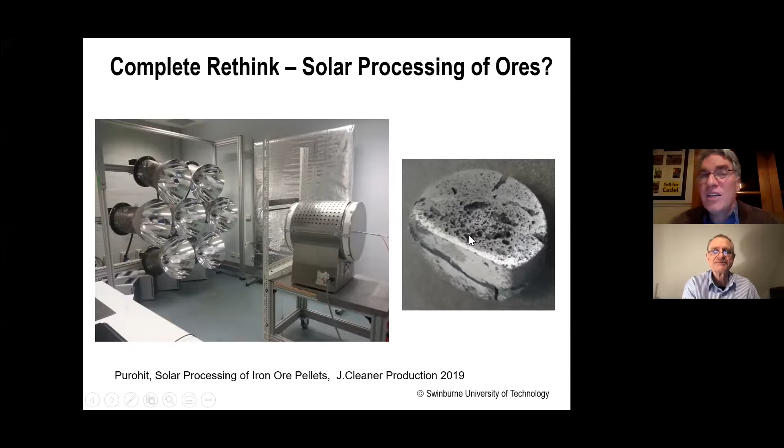You will probably know that Andrew Forrest has recently been coming out and saying rather loudly that we need to start thinking about this as an opportunity, that Australia could be a leader. Because we have good renewable energy resources, because we have iron ore, why don't we make hydrogen and why don't we make steel? We should become a leader. And I'm inclined to agree with him.

So my final thoughts are, and I hope I haven't made this too complex: the simple way to decarbonize the steel industry is to increase the use of scrap and combine it with renewable energy. That's the easiest, most obvious way to do something. We can make steel using hydrogen.

It's been shown to work. It can work. At the moment, green hydrogen is not maybe at the right scale. Hopefully it will come at the right scale and we can lower the cost. There are issues around processing hydrogen-generated DRI in electric arc furnaces. They're not trivial, they're quite important, and there needs to be a lot more thought put into that.

That's something that's not been given enough consideration. I just wrote a paper about that, and I've got a lot of reaction because people are starting to wake up to that topic. And if the EU goes radically down this hydrogen route in a hurry, what will that mean for world steel? Will they have to put up a tariff war if nobody else follows them? Because at this stage, nobody thinks it will be cheaper, right?

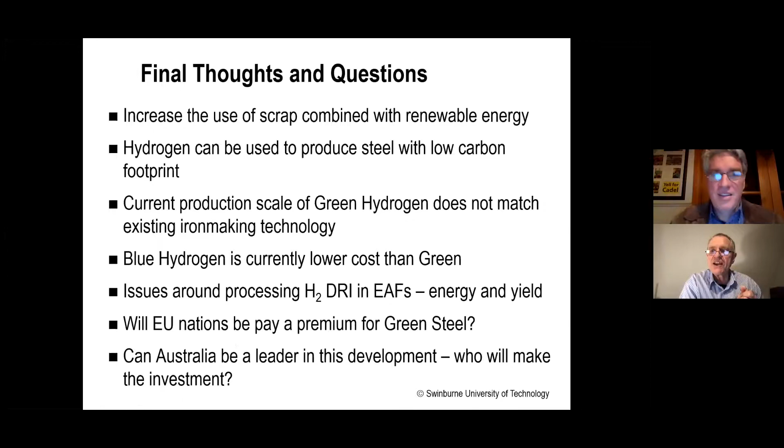So here's the first question from Malcolm Jenkins, who is also the chair of federal ANZAAS. He says that BHP attempted a DRI HBI plant at Port Hedland between '96 and '99 using FinMet, whatever that is, but lost their license due to accidents with hydrogen. Oh my goodness - will the risk profile of using hydrogen at high temperatures represent a major deterrent to uptake of this technology?

Yeah, so first of all, other people have built those processes around the world and they have operated safely. The unfortunate sequence of events at Port Hedland means that what Malcolm just asked is asked every time I present, because there's always somebody who remembers that. I think it's important to understand that when there's been a car accident outside your house, it doesn't mean there's been a car accident outside every house. There are serious issues around safety of hydrogen with DRI, but there are large industrial plants around the world that already operate with large amounts of hydrogen and they don't have any significant issues. Midrex has built a major industry on that basis.

So I hear the concern, but we should understand that there are quite a lot of companies that do this, and they do it with apparent safety.